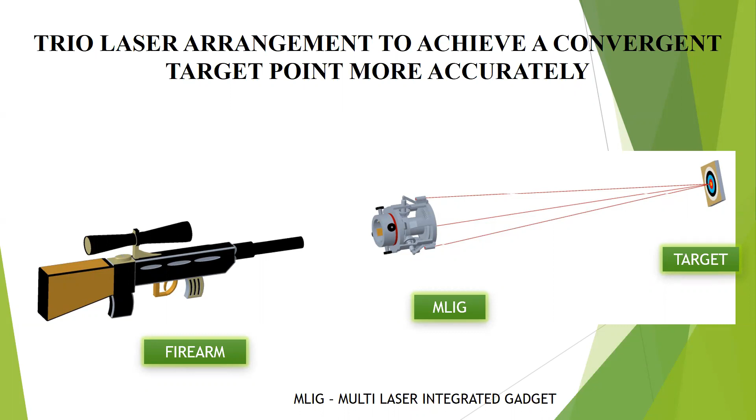I'm currently explaining for guns also. Then further, I'm developing the same part with the same concept, only changes in design. It can be used for rocket launchers and all missile launchers also. So now, prior art and why MLIG is required.

Before explaining how it works and what is its requirement, I'll explain the prior arts and the difference between the prior arts and MLIG.

The first point is the present way of firing the bullet in a firearm is completely dependent on the capability of the shooter. If any shooter is not well trained, he cannot hit the target properly. And even if he is well trained, he cannot hit the target properly, because sometimes psychological situations matter, mental situations matter. So many human errors, manual errors are there, just because of which he cannot shoot accurately.

And sometimes, in military bases, military areas, and any random environment, there are refractive mediums, refractive indexes, that's why the lasers deflect away from the target or apart from the target. So that offset laser is not a perfect indicator; it just indicates the direction of the target and not much more than that.

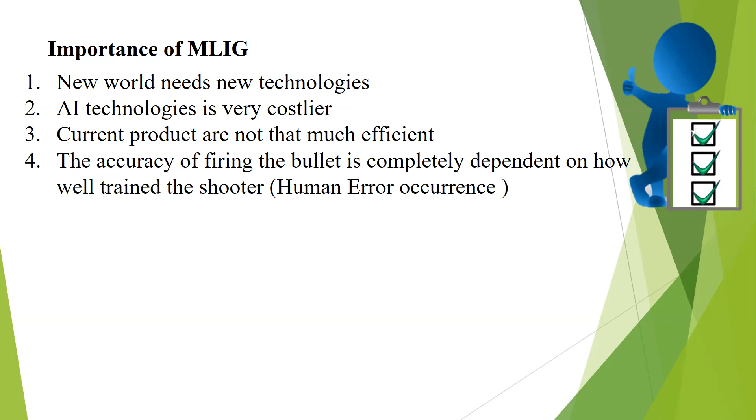So accuracy is most important when firing the bullet, because you have to hit the target in minimum time. Both things matter. I'm explaining the benefits to the society and the country.

First point is military application, and the second is security purposes. When we're at a military base and military environment, there is fog, smoke, dust particles, winds, and heat waves. All this environment creates refraction, and that refractive index makes it so he cannot judge the target. He wants to achieve and see that target perfectly, but he cannot look perfectly, so he cannot hit that target.

So MLIG helps you control the angle of the gun. And in a military application, the most important thing, I'm going to explain to you.

Suppose, for example, a rocket launcher requires 3 bombs to hit one tank. The tank cost is suppose one crore, and bomb cost is suppose one lakh rupees. If three perfect bombs can destroy a tank worth crores of rupees, but if we use a single launcher with 3 bombs at less accuracy, you require 4 to 5 launchers, meaning 12 to 15 bombs. Then cost doesn't matter because the tank costs 15 to 20 crore and bomb cost is not the issue at that time.

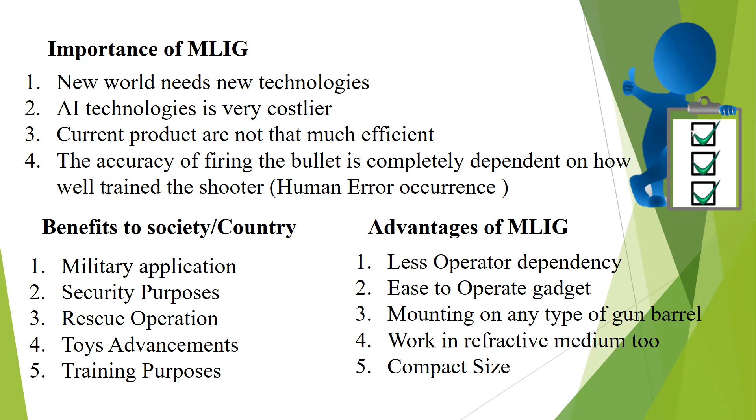In a refractive medium, a single laser diverts away from the target, but MLIG converges and adjusts its angle to locate the target properly. It's also compact in size, so it's very easy to carry. So how does it work?

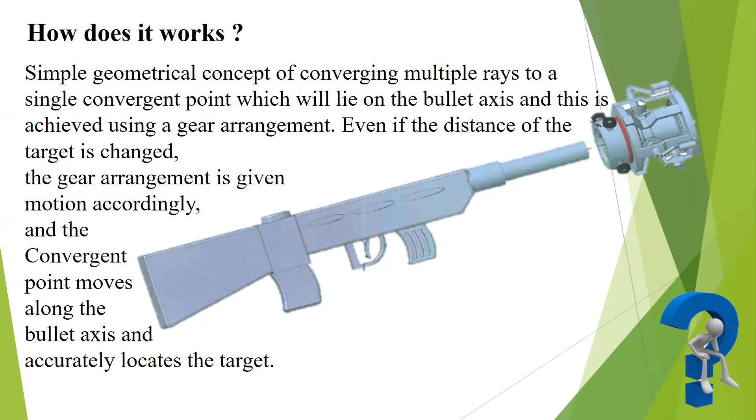It's a simple geometrical concept of converging multiple rays to a single convergent point, which lies on the bullet axis. To achieve this using a gear arrangement, even if the distance of the target changes, the gear arrangement is given motion accordingly. I have given a single knob. When we rotate that knob, it converts that rotation through the gear to the lifting arrangement, to the laser. I'll explain further, but that's the basic principle.

If we change L, all the slant heights remain equal in the right angle triangle, since we are using the same principle. If we check the angle between L and H, and change L and H, as L increases, H increases, and that H distance is the distance between the instrument and the target point. If we increase the length of the slant height, it means we are declining the laser.

And if we decrease the angle of the slant height, it means we are reducing the length of the slant height, adjusting it towards the target. So this is the adjusting mechanism, using the basic principles of the cone, and that's how it works. The convergence point moves according to whether it's away from the target or towards the target. So this is one basic concept here.

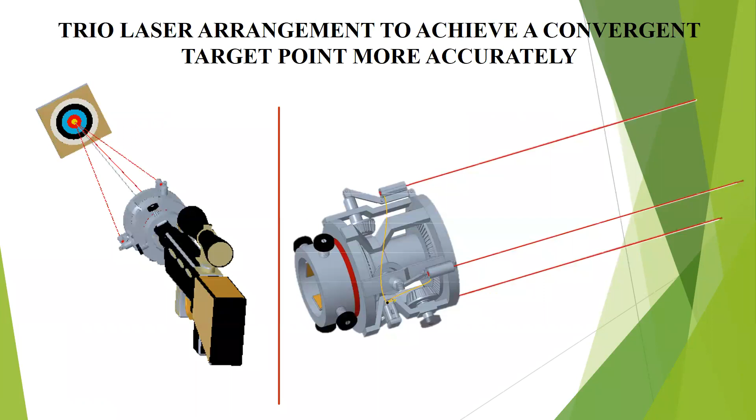Another arrangement is the spline and hub arrangement provided. It's working under gravitational conditions. It means for perfect mating and more accuracy. There are no pictures here of the spline and hub arrangement because it is inside the instrument's lifting arrangement. That's not that much important point here.

According to the distance from the target, the motion adjusts the convergence point along the bullet axis towards the target. Even if the distance of the target is changed, the convergence point follows the bullet axis and the target point is located accurately. This is one sheet here.

It's completely dependent on the laser specification. That's why we can achieve more than the target. But when I worked with the prototype, at that time I used a 40-meter trial. But theoretically, by using laser replacement, it's possible to achieve a target of 1 kilometer also, 2 kilometers also.

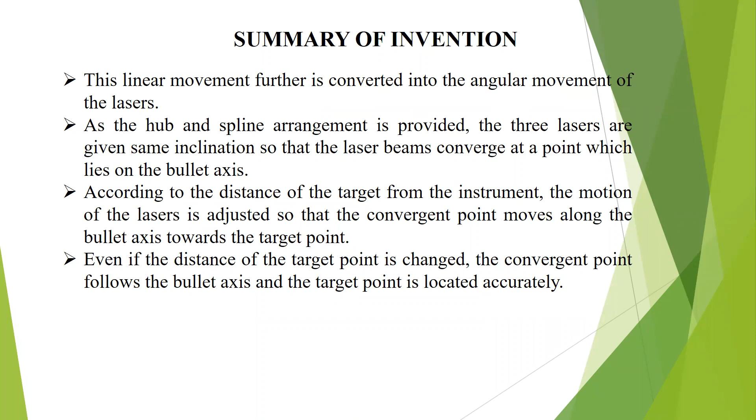Even if the distance of the target point changes, your convergent point follows the bullet axis and the target point is located accurately. I have made a prototype for the same concept.

So I'm going to explain how I worked on that. This is one basic prototype - I am using some PVC pipe for easy arrangement, and at that time I didn't have an actual purchase here. As I learned in school, I used a compass, ice cream sticks, and a marker laser.

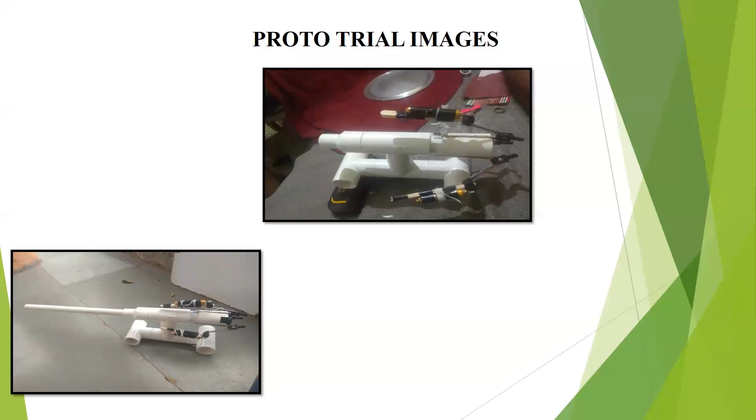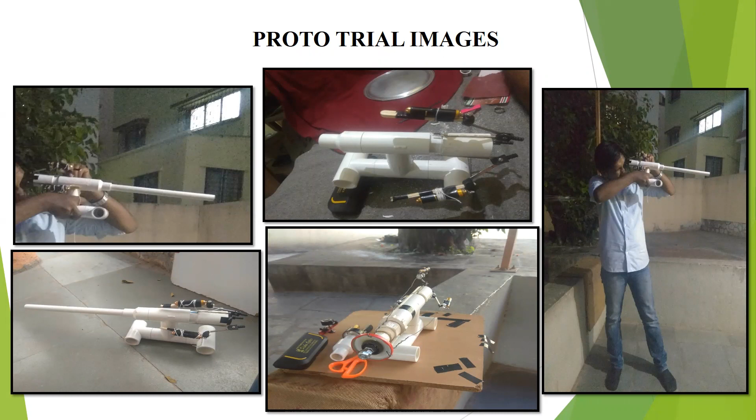Easy to operate, that's all. This is a very basic level photo. Then I modified it using an extension to the target, and you can see the center lower side photograph. The other photos are completely manual. The three lasers have no interlink between them, but in the center lower picture I connected them with metal wires, adding one bearing at the backside. This was just for the concept trial. When we rotate the backside knob or wheel, all the lasers converge and diverge at that time.

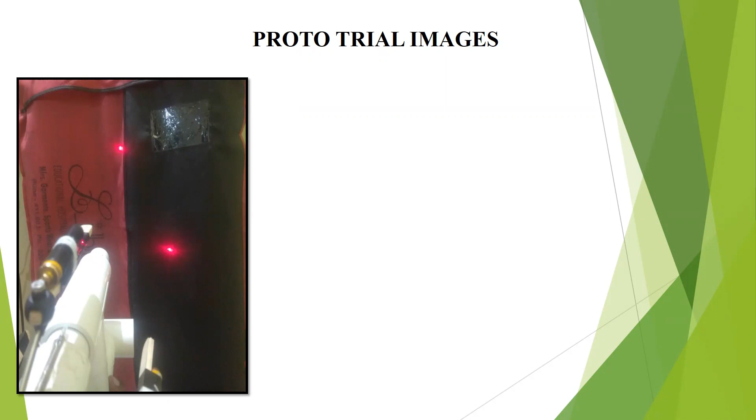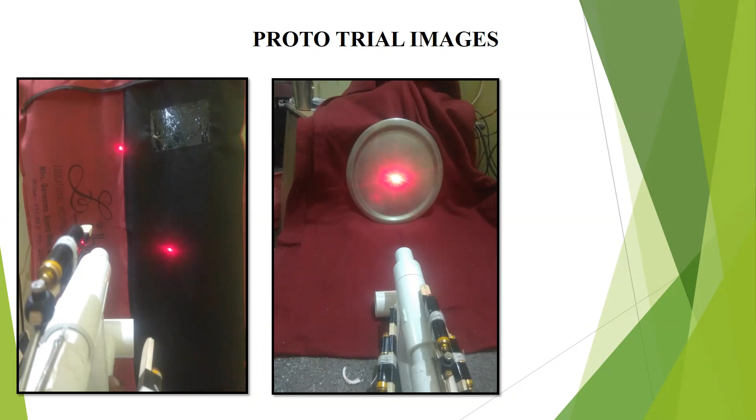So I took a trial, and at home I took a trial for the same also. You can see in the first picture the three lasers at different points, and the bullet is away at a relative angle of 120 degrees. Once we converge that, you can see in the second picture the targets converge at the center, meaning towards the target along the bullet axis. At that time I used this basic type of laser since it was easily available, because I took the trial in 2018 and 19.

Then after that I worked on the further design. This is the basic laser. If we study it, I have studied some lasers, and you can check the output power of this laser is 10,000 milliwatt. It's very large, almost the maximum specification of this type of laser.

The other specifications are not that important for us, but the laser range is 5,000 meters. If we use this laserpointerpro type of laser, even with that specification, the laser range is 5,000 meters, which is almost 5 kilometers. That's enough range, because normally we are looking for 1, 2, or 3 kilometers, but 5,000 meters is more. I think it's enough for this instrument.

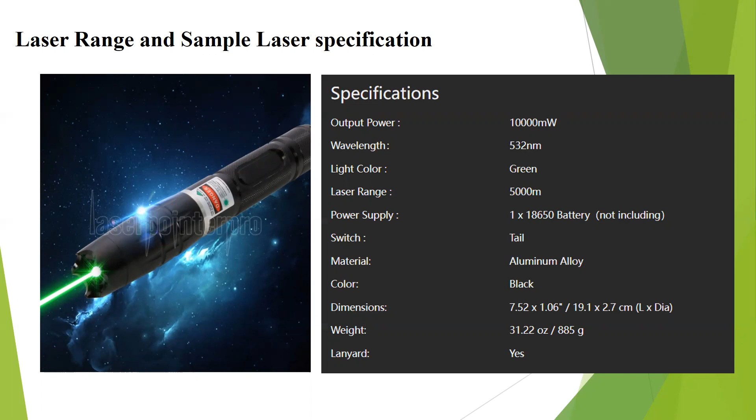And I have one video for the trial.

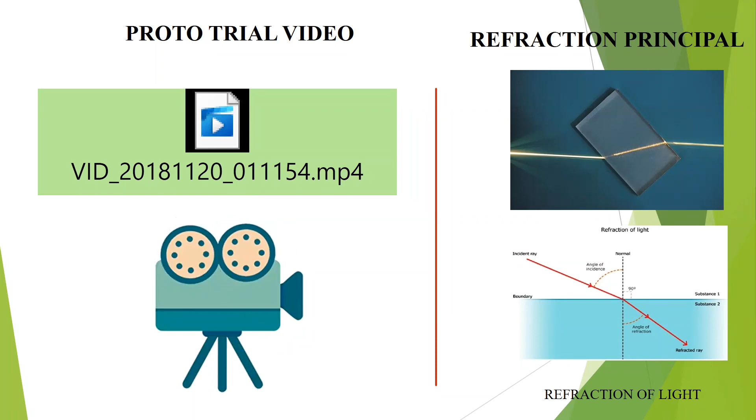Refraction principles are there. Refraction of light, everyone knows the incident ray. When the incident ray hits a refractive medium, it declines or inclines at an angle towards the normal. That's the same principle I used. But with a single laser we cannot confirm our refraction angle and convergent point. With three lasers, if the first laser declines at a 2-degree angle, the second laser should also decline at 2 degrees, and the third laser also. Then even in a refractive medium it works.

The current status of the patent and the project: the IP status is that the patent is already filed, and the status is that the first examination report has been issued. The design is completed, but for some different types of guns I'm studying launchers, and some parts are in the development phase. Manufacturing has not yet started because I am currently working on the FER.

So this is the last month for the FER. This month I have completed my FER and prototype, as I've shown in the figures, videos and photos. The prototype concept proof trial has been taken, and second is the worldwide market and the market in India.

Worldwide, every country uses weapons and ammunition, so demand for this product should be high everywhere, in wars and in rescue operations. Everywhere guns are used, launchers are used, rocket launchers are used, bomb launchers are used.

That's why demand for this instrument should be high, and there are possibilities of scaling up by using international platforms and patent platforms. There are chances people can connect with us and demand the product.

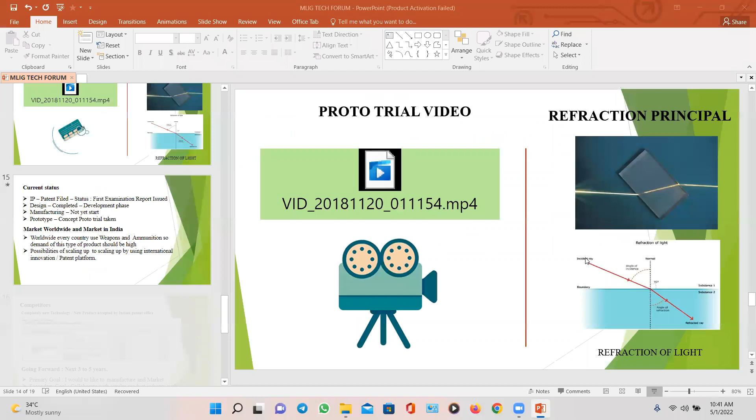Though your idea is good, it is a new idea. Your prototype is there, but it has a very limited range. But you rightly said that it can be increased by using proper diodes, and you have demonstrated it to Mr. Shirish Deshmukh, who is the DIMA president. Let DIMA evaluate your project, and if they find it is going to be useful for the nation, definitely they will take it up further.

And it calls for a lot of changes and modifications in your present prototype, and the prototype you are going to show and demonstrate. So without spending much time, I will request Shirish Deshmukh to proceed with his expert comments.

Thanks, Vilasji, and thanks, Sanket, for the excellent presentation. Your concept is really novel. We do appreciate it. But as I told you in one of our meetings, it needs to be put into real application, and then it needs some modification from the application and user point of view.

First of all, as you said, the accuracy - you said it is pinpoint accuracy. But we have to find out whether different weather conditions, foggy conditions, or any other environmental parameter will affect it. So we have to evaluate that. I'm not sure whether you have evaluated it, because we didn't discuss anything on that.

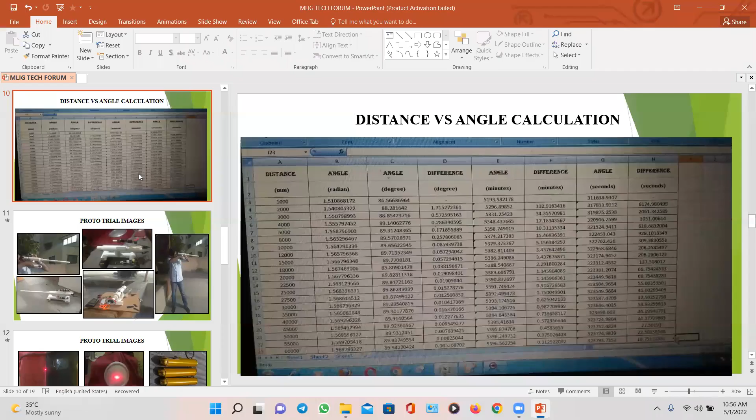So आपण या ठिकाणी question and answer session थांबवूया, unless somebody has a totally different question. तर एक शेवटचा चान्स देतो. If you are having any specific but different question, please go ahead.

अशा वेगवेगळ्या ऍप्लिकेशन साठी हे वापरता येईल तेव्हा प्रत्येकाला वेगवेगळी त्याची माउंटिंग अरेंजमेंट द्यावी लागेल, कदाचित वेगळा लेझर वापरावा लागेल. शोल्डर फायर, कारण प्रत्येकाची रिकॉइल ऍक्शन वेगळी असेल, प्रत्येकाची रेंज वेगळी असेल. तर हे सगळे एक्सपेरिमेंट आपल्याला करावे लागतील.

आता ही यांनी जी कन्सेप्ट प्रूव्ह केलेली आहे ती कन्सेप्ट अप्रिशिएट करू आपण, कारण त्याच्यावर अजून बरेच ट्रायल अँड एरर होतील. We have to make a summary of this, what range is required. Make groups like this and find out. Yes, I think as a tech forum and DIMA, we should appreciate Sanket's efforts, extend full support.